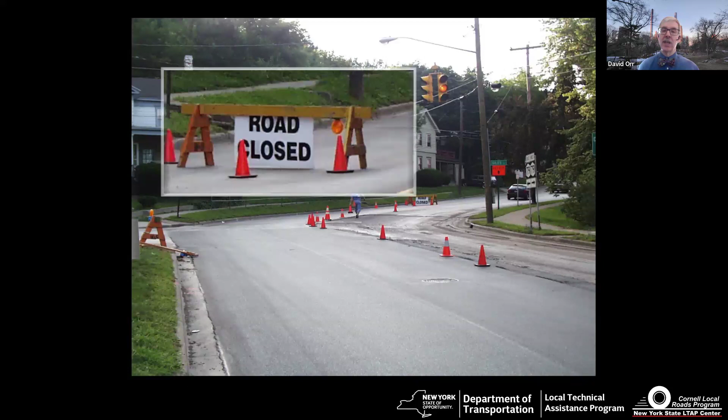Let's talk a little bit about who is using the work zone, because that might help us in terms of what we're doing for signage. So who are the work zone users? Tell me, who's using work zones? Let's put some answers in there, we're going to create a Wordle. If you don't know what a Wordle is, it's those little word maps that show up. Let's see who you think the work zone users are. And if you can't put it in, just put it in the Q&A and we'll mentally add that into the pool.

So we've got workers, pedestrians, drivers, grandparents, everyone, vehicles, bikes. A work zone user, yeah, the workers are in there and they're really important, we'll talk about that. The drivers, the pedestrians, everybody, dog walkers. Yeah, my friend was out walking his dog. Yeah, those are all people in a work zone, and we're changing what they're used to.

So it's really important in a work zone to communicate this information really well. Okay, so let's talk a little bit about some of these users. Now I've got my list, and as you can see, I've got the public, equipment operators, supervisors, and traffic control personnel.

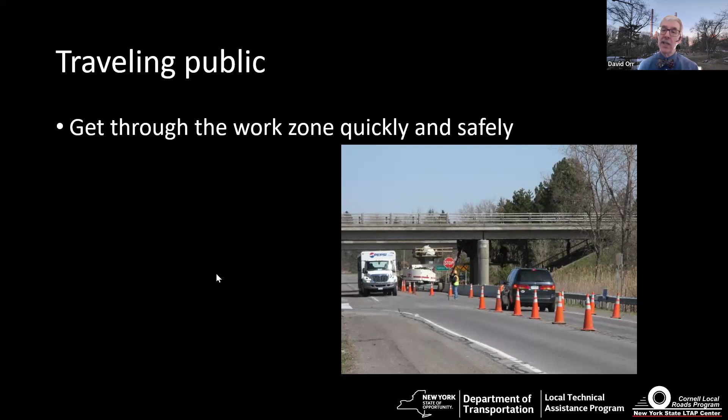I'm grouping them into these four areas because they generally have different points of view when they hit a work zone. The public, the traveling public, they just don't want to be slowed down. They know how to go, and a detour or slowing them down just confuses them. They really want to get through that work zone really fast, and while they don't think about it, they want to do it safely.

Equipment operators, on the other hand, let's be honest, are focused on getting the job done, as they should be. So they want to keep working without slowing down. A well-done work zone will actually help them there. And here's a case where maybe it could be a little bit better—I'm a little worried about where that flagger is standing. We'll talk about why that's really a bad location later on.

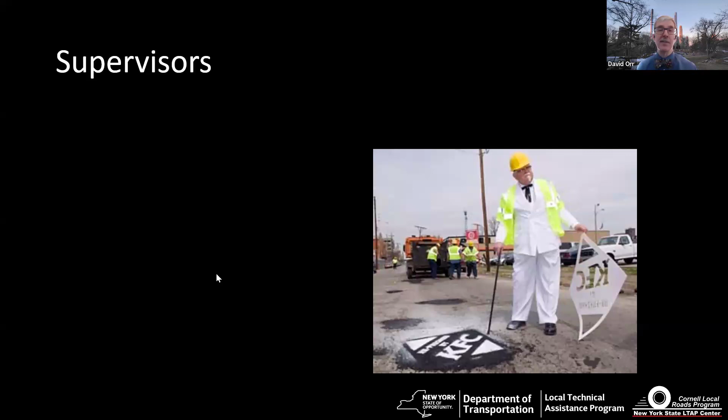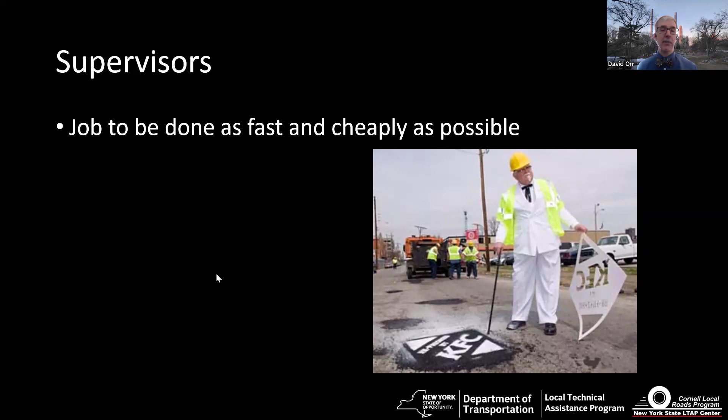The supervisor for the job—there's Colonel Sanders supervising some pothole filling in, yes, you guessed it, Louisville, Kentucky. They want to get the job done as fast and as cheaply as possible, and this is a little different focus than the equipment operators and the truck drivers and the folks doing the work.

And then finally, of course, the people doing the flagging and the traffic control. They really want to be able to operate a work zone easily with no safety issues. But if you've done much with a work zone, flagging traffic is either really exciting or really boring. It's that middle ground which we'd like to have, but it doesn't happen that often. This guy probably should be in a little bit better place and maybe paying just a little more attention, but we can talk about that.

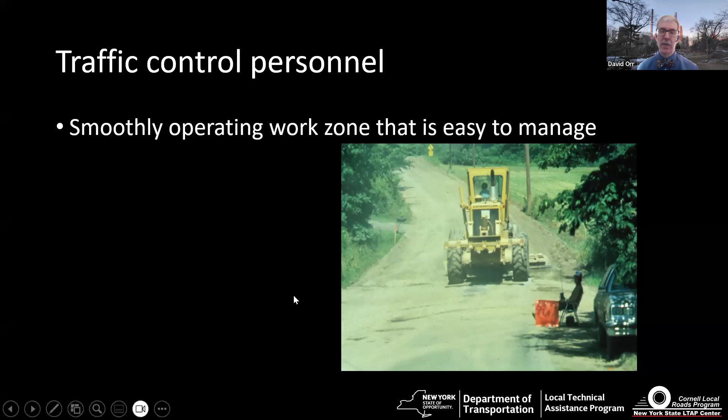So no one wants to be inconvenienced or placed in harm's way. That's really the ultimate goal of a good work zone, and it's a balancing act. Now, in terms of the traveling public, they want to make sure they can get through the site. They want to be able to see things. They've got their cars that they're dealing with, and they don't want to be slowed down.

So we got the traveling public with their cars. We've got buses that might have to get through a site, both a city bus and a school bus. So when you set up your work zone, you may want to think about what buses you've got to deal with, maybe even work with the bus companies to move things around. Of course, trucks have big turning radii that you got to deal with. You got bicycles, especially in urban areas, but more and more in rural areas. I worked in Yates before I was with Cornell, and there were a lot of bicyclists, both recreational riders and the Mennonite community you had to deal with.

Pedestrians are very vulnerable when they're outside their vehicles, so you have to think very differently about dealing with them. Different users have different needs—people who are handicapped in one way or another. We have to think not only about meeting the requirements of the ADA, but about really doing the right thing. One of the cool things is if you think about people in a walker, in a wheelchair, maybe colorblind, when you set up a good work zone for them, you're also setting it up for the pedestrians, for the mom walking her kids, or people walking their dogs. So if you think about those vulnerable users, you think about everybody—it's actually a pretty good way to do it.

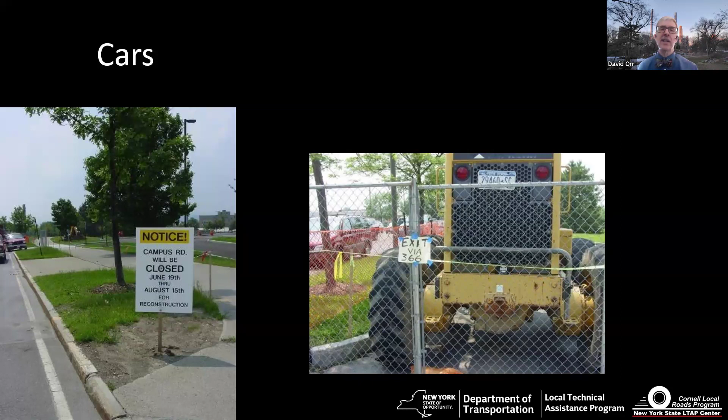Now, in terms of cars, you've got to give them notice they can see at the speeds they're traveling. A little sign like this might work in a parking lot, but on a main road, not so much. Or this one's even worse—they closed off the exit from a parking lot and put up this little sign that said exit via the state route. We've got to communicate a little bit better and have bigger signage.

In terms of the buses, again, you may want to work with the bus companies, and remember, they're going to have a different turning curve.

Don't make the lanes too narrow. You may have to widen things up. In terms of the trucks, they need to get in and out of the work zone, but you've also got through trucks. There might be a dump truck like this, or it might be a semi-tractor. So keep that in mind.

And again, of course, the bicyclist - don't you love it when you see a sign put right where the bicyclist or the pedestrian wants to walk? You're going to now force that bicyclist back out into traffic. So think about these things. And again, good signage helps everybody out.

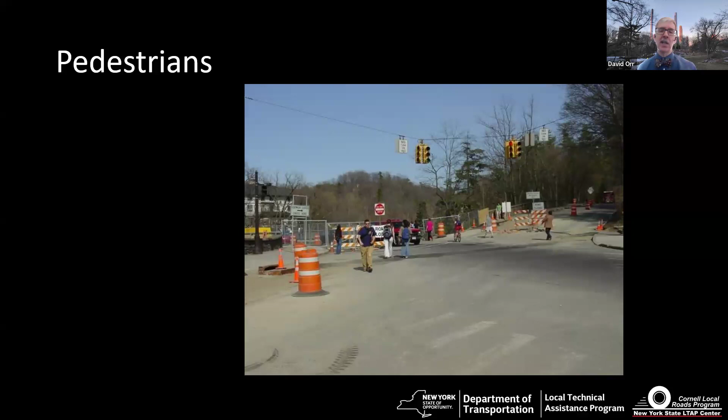And by the way, one thing about pedestrians: go where they go. You almost have to do a little bit extra signage if you really want to keep them out of a particular area, because they'll go where they think they need to go - through, around, diagonal, just keep that in mind. I mean, here it says pedestrians prohibited. They put up a diagonal sign, but more than a few times I would catch somebody had gone behind the fence line because they thought they needed to go where the truck was. So you got to think about what people do.

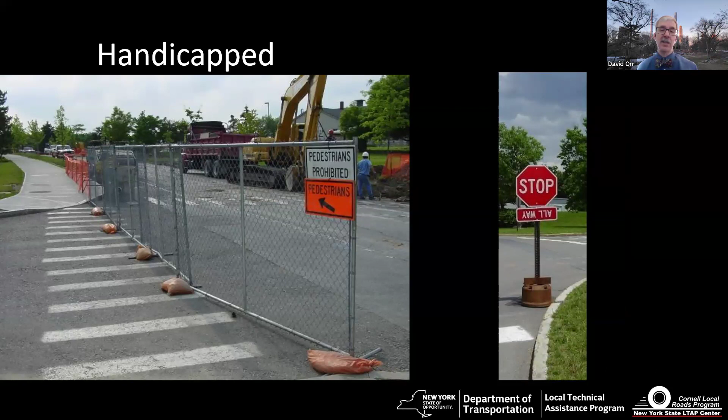And of course, for a handicapped person, they may not even realize they're getting into a dangerous zone if you don't prevent them from getting into that area, especially someone who's blind or has limited vision. So keep that in mind.

Okay, so let's ask ourselves, what are the regulations? What are the requirements that we're supposed to meet for work zones? Well, right now, as of today, currently, there is the National MUTCD from 2009, but it's really short-lived, and the New York State supplement to the National Manual on Uniform Traffic Control Devices, the MUTCD, plus New York State itself, DOT, has added some rules and regulations on top of it.

There was a brand new edition of the MUTCD. It was released back at the end of last year, and it has a 90-day window. It will be coming active really, really soon. Okay, I have good news and I have bad news. The good news is the changes really surprisingly aren't as great as you might think. The bad news is there are some changes coming. So watch this space - we will let you know about the critical ones.

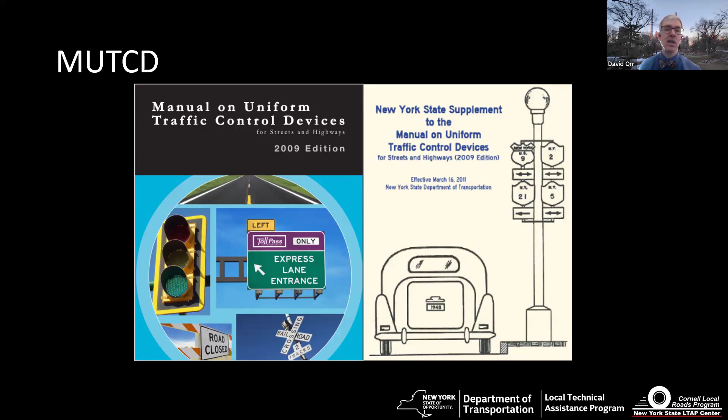Now, the key thing to think about, and this started with the last MUTCD, it's still true: the MUTCD applies for all roads open to public travel. Now, they did make some changes in the next edition in terms of parking lot alleys and stuff that were technically included last time and are no longer included. But again, essentially, if it's a road, treat it as a road and think about how the public's going to use it, okay? But whether you're in the road or not, think about all those users.

That's the key with good signage. Someone sees it, it's a clear, simple message, it's easy to follow, and it tells them what to do. Yeah, I agree with you, Donna. No, it really should be telling people where to go next. Give them good information. Sharp bend?

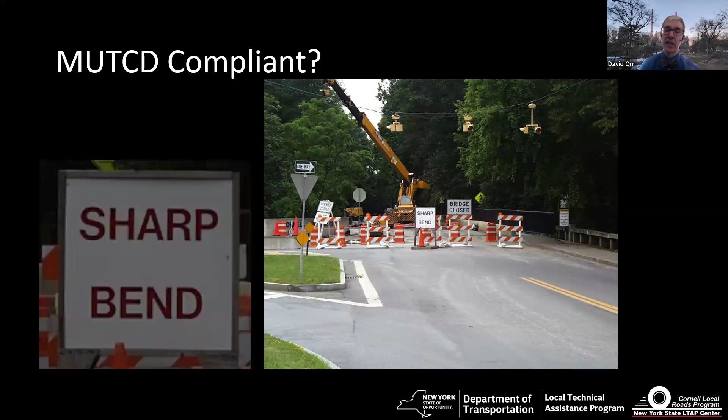Oh, and by the way, it's not reflective. It looks nice and bright during the day, but at night, you can't see it until your lights actually hit it when you get close to it. Luckily, most people knew you had to go to the left here, but really, we should be doing a better job of signing. What would you do there?

What would you do in that particular site? And again, it's an active poll. I'm going to pop back over here so you can see the picture real quick for those who want to see the picture. What would you do there instead?

Okay, so let's see what you guys have put in there. Okay, reflective left arrow, some chevrons. Yep.

So you really need to think about the use of directional signage. You might even want to go back with an advanced warning sign that lets people know, hey, it's no longer an intersection, it's now essentially a curve. During the work zone period, it's a curve.

So think about the user and simplify the signage, okay? Because if you don't, what you're going to do is confuse people, and too many messages create problems for folks, okay?

So what I would be thinking about is some chevrons, some advanced signage. Technically, that advanced signage should be orange and black, but I'll be honest with you, if you've got yellow and black in your stack and you can give people good information, you do what you got to do. Make sure you document it.

But yeah, technically work zone signs should be orange and black, but make it better signage, make it clear, okay? If you're not sure, show it to somebody who's not familiar with all the processes and see if they get confused. Show them a picture or show them a drawing. It can actually help quite a bit to make things clear, okay? So keep that in mind.

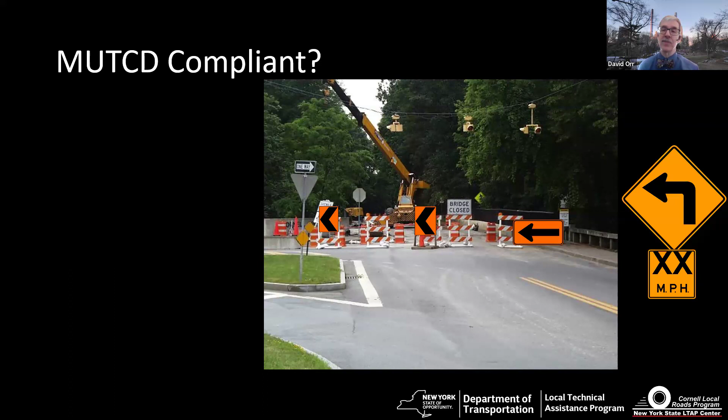So work zone warning signs are supposed to be black on orange. Again, there are some exceptions. There is one major exception that's always yellow and black, and that's a railroad crossing. They're 36 inches in size. I mean, you think, wow, that seems big, but at 55 miles an hour, it's really not that big. In fact, on the interstate, they should be even larger.

They need to be at least 1 foot off the ground for a variety of reasons, not the least of which is they're on the ground, they get disrespected, but also you want them to be able to be seen. And for a long-term work zone, you may even want to put them on a permanent mounted sign up at the 5 or 7 feet you would have, depending whether you're in an urban or rural area.

They need to be retroreflective. We say, well, we're not out there at night, but if you're there early in the morning or late at night, especially this time of year in the winter when the sun comes up late and goes to bed early, it needs to be something retroreflective. Plus, it actually helps even during the day to have the sign light come right back to the vehicle.

You need to have advance warning, give people time to react. And then one of my biggest pet peeves: remove or turn the sign when it's not needed. Doesn't take much. And we'll talk about that again because it's that important.

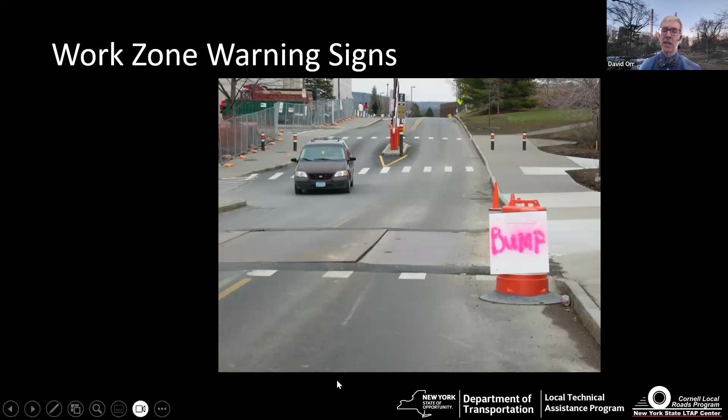Everybody who's in a work zone should be wearing a high visibility vest and safety apparel. And that includes the fire and police when they're not doing certain activities. Fire police need to have it, or someone directing traffic. The vest is really important.

Heck, if you know me, you know I actually gave my wife a safety vest for Christmas. Yeah, and she's gone through 3 of them now. She's on her 4th because she uses it to keep herself safe.

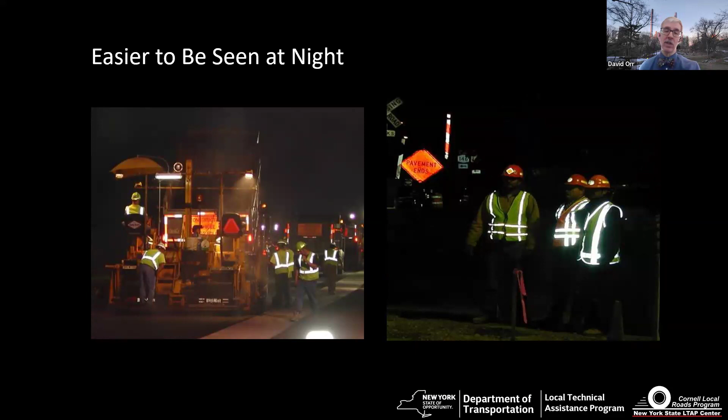So it is a safety culture thing, but make sure everybody can be seen. They need to have those stripes if they're in the right of way, and it makes a big difference to keeping people safe. It's easier to be seen at night if you've got on the proper equipment. Your vehicle's lights hit them, you can see the workers working at night, and it's true early in the morning and late at night as well.

At 55 miles an hour, you can't tell. If you don't see the person, it doesn't matter, you're still going to have problems. So everybody should be having a vest on so they can be seen day and night.

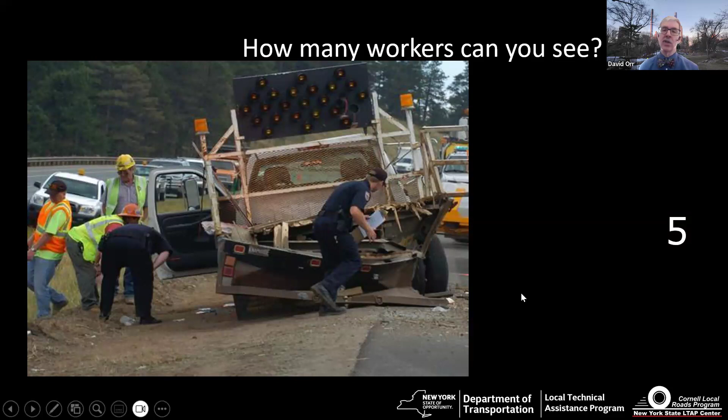It really helps. I mean, how many people on the right in that particular photograph? Okay, I got a 6. I got a 7, got a 6. One thing about work zones, especially complicated work zones, we get all this orange barrels and signs and people get lost. If you look now that we've got the picture, there are actually 5 workers there.

One's wearing an alternative color. And actually, we recommend that the flagging crew, the work zone crew, sometimes purposely wears an alternative color, the lime green, so they can be seen. And then, of course, we have somebody, probably the supervisor, actually more likely probably the engineer, who hasn't bothered to put on his vest yet because he thinks he's okay. We catch ourselves doing that. We probably should do better. But so something to be thinking about.

Okay, thanks for letting me know. Some people are having their picture show up delayed. I'll try to slow down. It could just be the Wi-Fi connection. That's always the challenge of the webinars. We'll have fun with it.

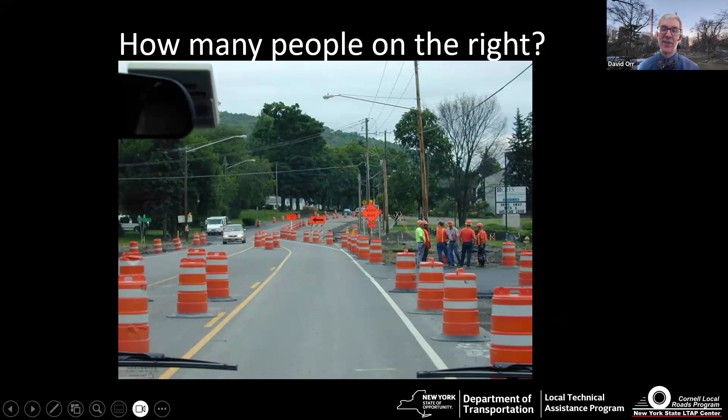Okay, so what are the qualifications for a good flagger, by the way? Let's talk a little bit about flaggers. What are some qualifications for a good flagger? Let's see what y'all think. Attentive, trained, precise, alert, because the world needs more alerts.

Okay, get off the phone. Watching, focused, yep, aware of what's going on. Yeah, pays attention, engaging, yep. Shows respect, dresses well, yeah. These are all qualifications for a good flagger.

Okay, let's go see what I've got. Flaggers must be alert, okay, and that's absolutely critical. We really do need to have flaggers be alert, okay. They need to be visible, standing away from the work so they're not hidden, okay.

They need to be motivated. They need to be trained. They need to stand alone away from things. Okay, they need to face traffic because that's really what they're trying to do is they're trying to see traffic coming in the work zone. But how many times do you see workers standing facing the work zone? Oh, I want to be in the work. Their job is to protect the crew, including themselves.

Okay, now somebody put in the Q&A they need to be certified by the union. If they're on a union job, that may be possible. New York State, interesting, does not have a requirement that the flagger have a card, but they do have to be trained. Okay, it's a little different than some states that require they have a certification card, if you're wondering.

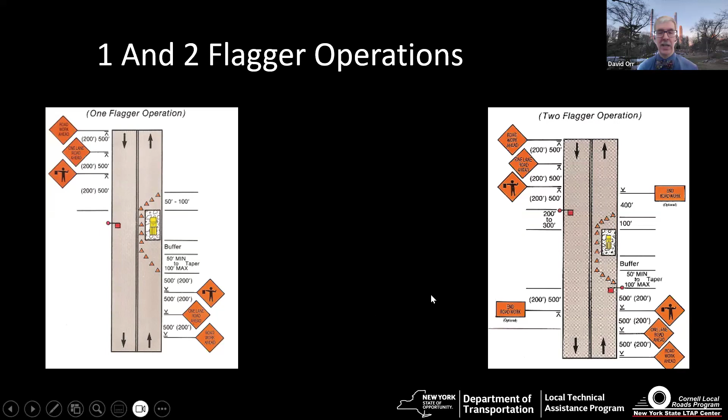If the work zone is long enough that they can't walk back and forth and stop all the traffic, you need two flaggers. So with one flagger, that person actually has to keep moving back and forth. You need somebody with the ability to be flexible and move. It sounds like you're saving money, but your risk goes way up, and it's not recommended in a lot of cases. Really think about the two flagger operations.

Now, there are lots of other choices. For instance, at an intersection you may need multiple flaggers, and you may even have to have someone with a flag in that case. Maybe you could set up a detour and get traffic away from the site completely, and then you wouldn't have to have flagging at all.

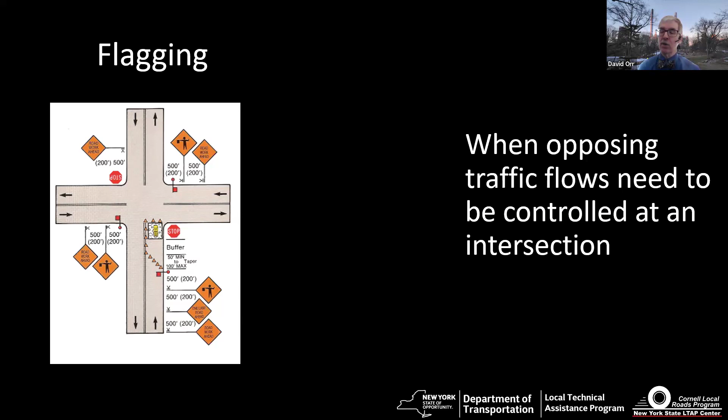Don't be cheap. I know it's hard, especially in small towns with a crew of 4 or 5 or 6 or 7 -- wow, big crew. It's a challenge, I know. Maybe you work with a fellow town, maybe you work with the village. Try to spread that burden out, because flagging is really, really important.

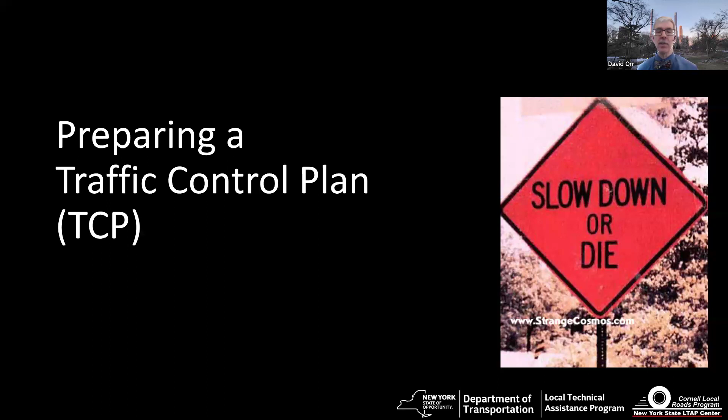Now, what I want to do is finish up the last half of our session together. We want to prepare a traffic control plan, okay? I really believe in traffic control plans. On the other hand, some can get really complicated. Let's keep it simple. Now, a traffic control plan is specific to the work zone for the day, okay?

Okay, I've got a little fact here. I'm going to read it. According to Ed Sterowitz, he's a safety guy -- if you don't know him, he likes to do risk management, he was our risk management guy earlier -- he says in 2002 there were 441 work zone intrusions on the state system.

Now if you think about it, the state only owns about 15% of the road mileage, but they do have about half the traffic. So if you just double that number, that means there were about 800 to 900 work zone intrusions. So we need a good plan. We can't have intrusions, we don't want cars in there.

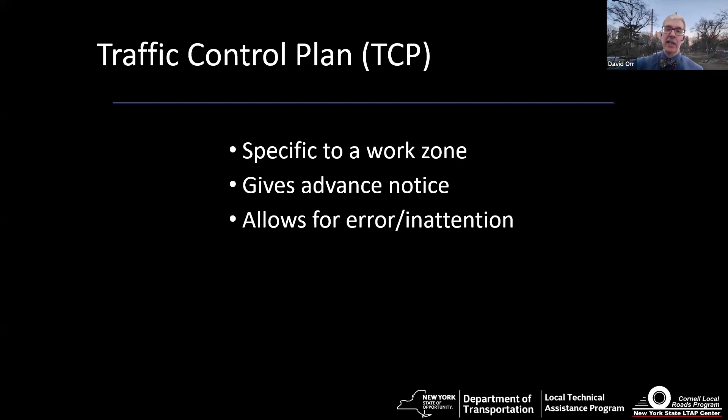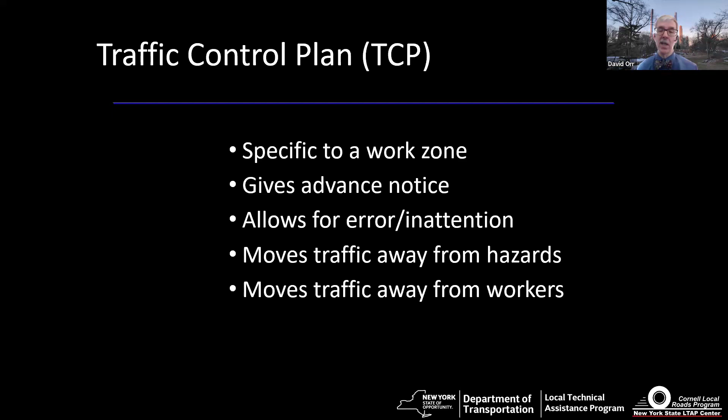So a good plan, specific to the work zone, gives advance notice. It allows for error and inattention, like it or not -- people have got their phones and they're driving with them, or trying to use the touch screen thing on the modern car. You got to allow for that. That's why advanced signs are key. Move the traffic away from the hazards and away from the crew. Absolutely key. And of course, if you do that, you're going to have a safer plan.

So what documentation do I need in my traffic control plan? Let's put in there: what's your documentation in your traffic control plan? You're going to have a layout, you're going to have a written plan, and you're going to show where your flaggers are going to stand.

You may want to have an engineer stamp it, especially for detours. I think long-term work zones and anything that's going to have a detour really should be thinking about having an engineer look at it, and certainly in some cases some agencies do require it. But again, do you have access to an engineer is something to think about. What equipment, what personnel are you going to have?

Where are the signs going to be? Yeah, the proper advanced signage. We all know these things. We go, oh boy, it seems like a lot of work. But it turns out it's not that bad. I mean, in terms of documentation, it would really be nice to know.

There we go. It would really be nice to know the starting and ending time of the work.

And you're thinking, wait a second, I don't know the ending time. Well, you start with a sketch of where you think you're going to start and end, and then you modify it. Keep it simple. There's no point in getting complicated.

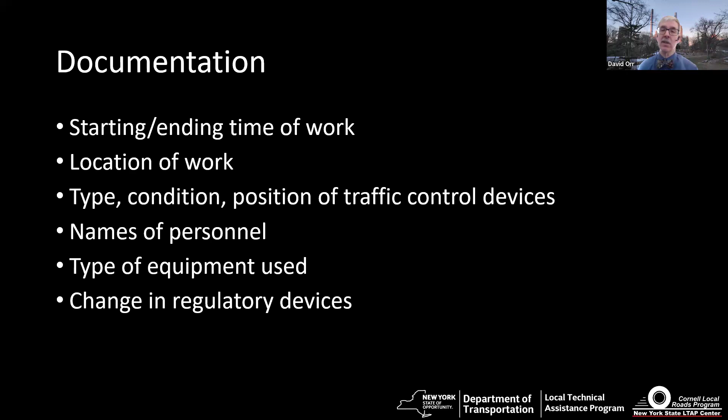You can do the location, what road you're on, what are the positions of the traffic control devices, the personnel, the equipment, any changes to regulatory devices. This is actually a really key one. If you cover up a stop sign or turn off a traffic light for the day, make a note of that. Put it down in the documentation.

Now, the pocket guides that we've got, and we have an app by the way, I'll talk about that a little bit too, make that job easy for the majority of your work zone. For your simple work zones, it's really easy, okay?

And yes, for a long one, you'd need a detour plan. But for a simple one, you've got 5 parts: your termination area, your work zone, your buffer, your transition, your advance warning area. They're in the pocket guide. You don't have to reinvent the wheel at all.

Now, in terms of your advanced warning area, that's where you have your 3 signs in advance of the work zone. So you're going to document that down. You're going to have that in your traffic control plan. You're going to have your initial warning, give some more specifics, and then tell people what to do.

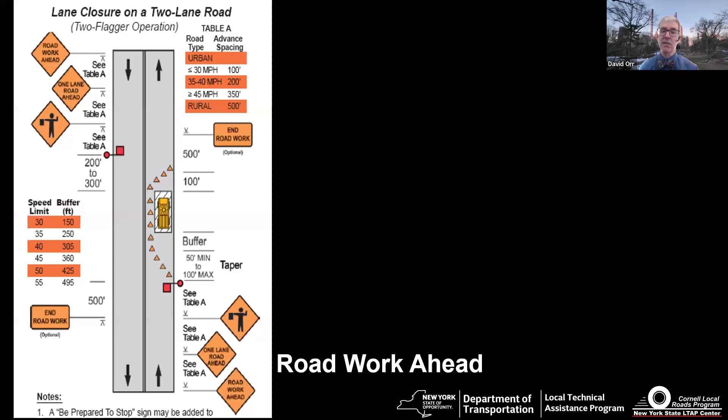So here's the example of the 2 flagger setup. We've got road work ahead. We've got a 1-lane road coming up, and you've got a flagger. That tells people what to do. 1, 2, 3. Keep it simple.

The transition area is where you take people out of their lane. And this is where the most issues occur, because if they haven't seen the signs in advance, this is where you're going to have problems.

Your flagger should be standing off to the side, with an escape route if something does go wrong. If somebody comes through that work zone, the 2 choices are run into the other lane, not a good idea, or run and hit a piece of equipment and get trapped. They really need to be standing in a place where they're safer. Having a crash attenuator is again going to be recommended on all state jobs and maybe on others, but you've got to have the flagger standing in a safe spot.

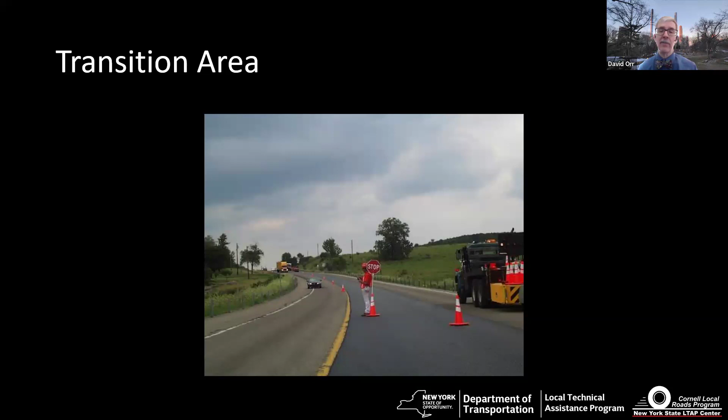You need a buffer area. That's the distance between where those transition cones are and the actual work. Now, again, that work area is important, but you need to have a buffer in front of that work area. In this case, there's no buffer at all. Think about putting in a buffer so that if someone goes through the cones, they still have time to stop. In this case, it's what, 20 feet, maybe 50?

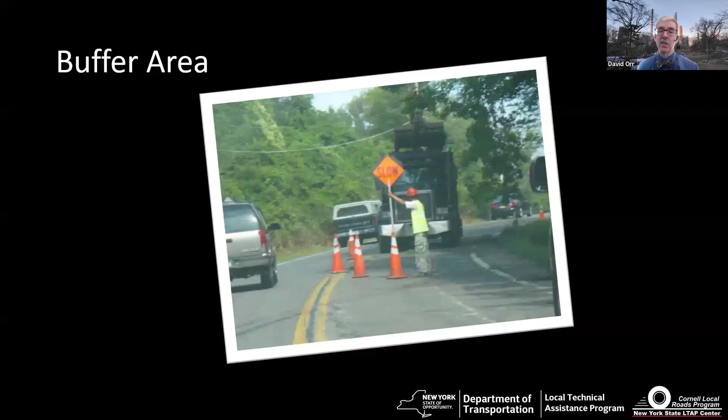And if someone goes past that flagger, who again is in the lane, they're going to just wind up in the work zone and hit the crew. So really think about that. You really want to put some cones out. Cones help a lot. And where's that flagger? He should be standing, if he's one flagger, on the other side of the road. Can you really control the traffic in this case? So really could be a challenge, okay?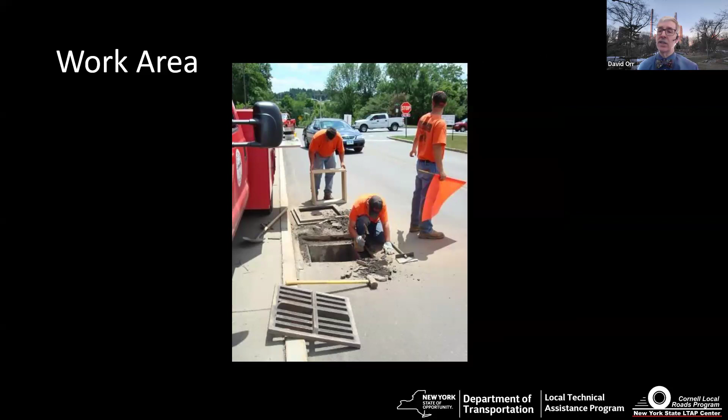Now, the last thing is the termination area. That's the sign that says the end of the work zone. If it's obvious, you don't have to put that sign up, but if you're not sure, put the sign up. It's simple and easy, especially for long-term ones. It's probably not a bad idea.

Now, how far apart do we put these signs? Well, in an urban area, 100 to 350 feet, and again, adjust to the site. Just think about the old Burma Shave signs. Yeah, I know I'm dating myself, but 1, 2, 3, go.

In a rural area, you need about 500 feet, by the way, just to give people time to be able to read, hey, road work ahead, hey, 1-lane road ahead, there's a flagger. Give people time. And again, if you change from the standards, document it.

In terms of placement and approval, is it based on the roadway speed limit? In a rural area, we just typically go with the 500 feet because we know what people are actually doing for speed. And yes, urban areas are based upon the speed limits involved, but also think about what people are actually driving. If they're going really fast, you might want to go with a bigger spacing to give more reaction time. The nice thing about 3 signs is it makes it pretty simple.

If you've got 3 signs, you've got plenty of reaction time. And the key is good spacing. Don't go too far, and those spacings they found have worked pretty well. There's some speed limits in there in the pocket guide.

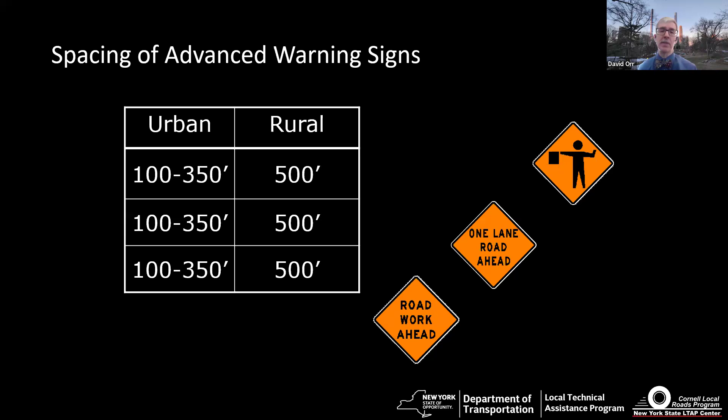In terms of placement and removal, before you get in the work zone, you put up your 3 advanced signs. So the first sign you put up is the road work ahead, before you've done anything else. Then your 1-lane road sign, your flagger symbol, then you put the flagger out there to start controlling traffic, then you put up your cones. At the end of the day, you take the cones down and remove things in the exact opposite order.

We'll go through those in more detail in the long full-day class.

The critical point: hide, cover, or turn away the work zone signs when they're not needed. If you're working on a road during lunchtime and taking some time off, but there are still workers in the area, you can leave the work zone ahead sign, even the road work sign, but at least turn the flagger symbol. If it's going to be a long period, maybe turn the first 2 signs. It really helps. If the driver sees the signs are turned, they realize right now they're on a break, not actually working, but they might be later. So when they come back through and see the signs turned, it really helps.

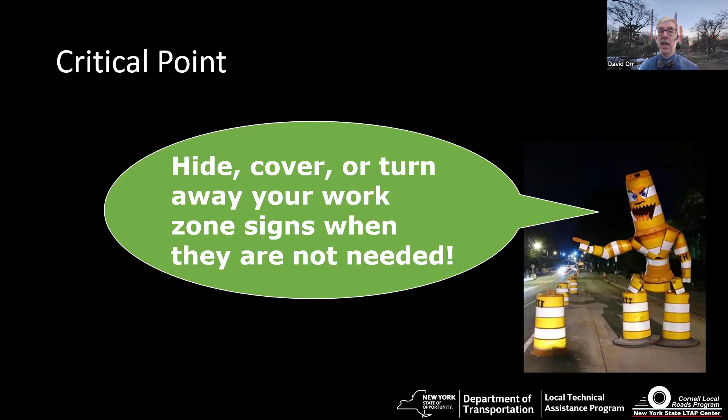On the other hand, if the signs are always up, even when you're not working, or worse, in the middle of the night, the next time someone comes through, you know what they're going to do—they're going to ignore it. They're much more likely to drive into your work zone and be one of those 400 plus intrusions on the state system, and probably close to 900 on the local and state system every single year. So turn and cover them.

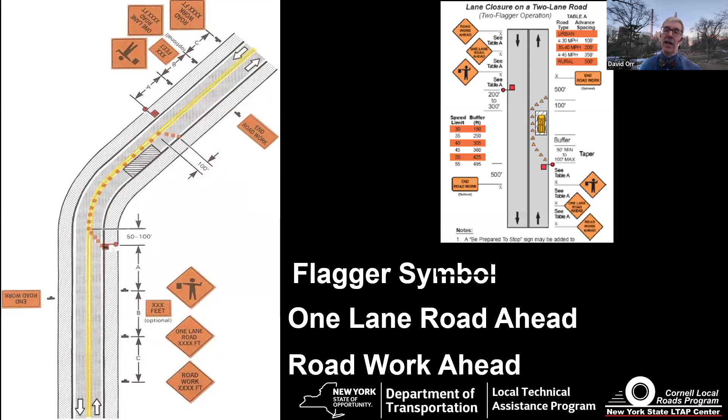Now, you can get fancy. There might be curves, you might have to adjust for things like that, but it's still the same—give people those 3 advanced signs and really help them out. The pocket guide shows it as being straight, so you might want to document slightly differently.

Can you always do that? Well, in an urban area, it could be tough. So you adjust, you do what you can, but think about what you really need. In this case it says 1-lane road ahead, but it probably is 2 lanes—you probably could have just gotten away with 'road narrows.' But what have you got?

Now, a good note made by Paul about the fact that you can reduce the speed limit. You can—it's actually relatively easy to do. You can lower the speed limit in a work zone. To do that, there's some documentation you have to do, there's some standards, but you can do it. Just make sure you cover the other signs when you put up a work zone sign, so the only signs people see are the current proper signs.

So we're going to prepare a traffic control plan. Now we've taken all this stuff and thrown a bunch at you. We're going to go back to our friendly example with the flagger standing in the wrong spot. You can see this is actually on the Cornell campus, and there's the catch basin they're working on. It's a relatively high volume roadway—a few thousand cars a day actually.

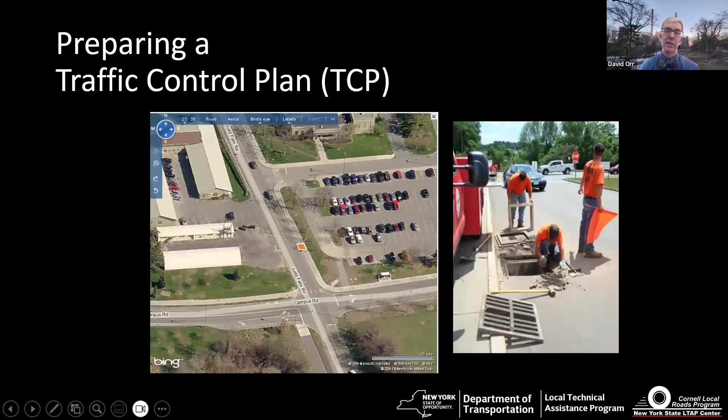So let's ask you—I'm going to give you some choices: lane closure, minor urban street, self-regulating; lane closure, 2-lane low volume road, 1 flagger operation; or lane closure on a 2-lane, 2 flagger operation. I don't have a poll, so just in the Q&A, tell me what you think you would choose.

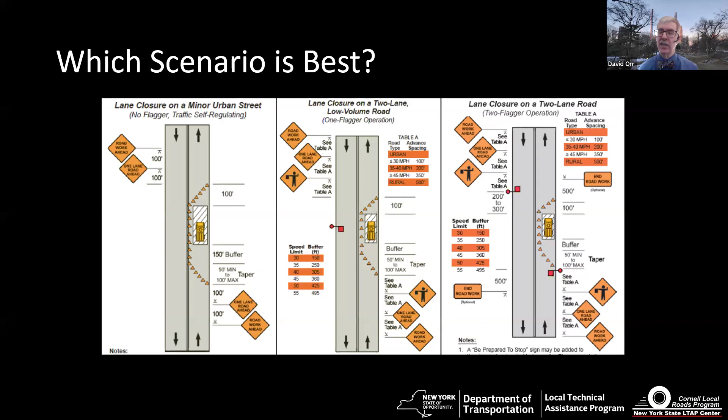You'd use the third choice, 2 flagger operation. Yep, most of you, I hope you say 2 flagger. That really is a 2 flagger operation. It's really risky to do the 1 flagger operation with that kind of volume. And self-regulating, that's designed for a residential area where it's 10 vehicles a day, and you've got to worry more about people walking their dog than anything else.

Now, in terms of keeping it simple, let's say you're working on a minor low volume road and you can get away with just a lane closure, no flagger, just closing the lane down for the day. You can take that little pocket guide, walk over to your copier, put down the drawing that fits your scenario best, put it on the copier and hit go. You now have a work zone traffic control plan. Then all you have to do is fill in all the details on the right: the date, the work, the crew, the equipment. If you change the sign out, like in this case a utility work ahead rather than a road work ahead sign, just fill those things out. You can do a work zone plan in less than 5 minutes that will not only hold up in court, but give good communication to your crew and eventually good communication to the public. So it's a win-win.

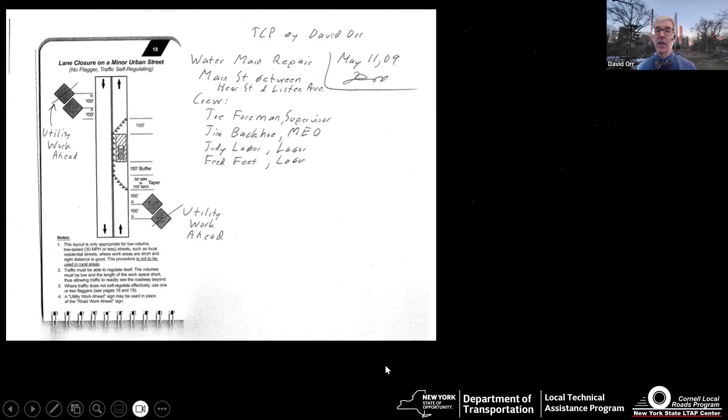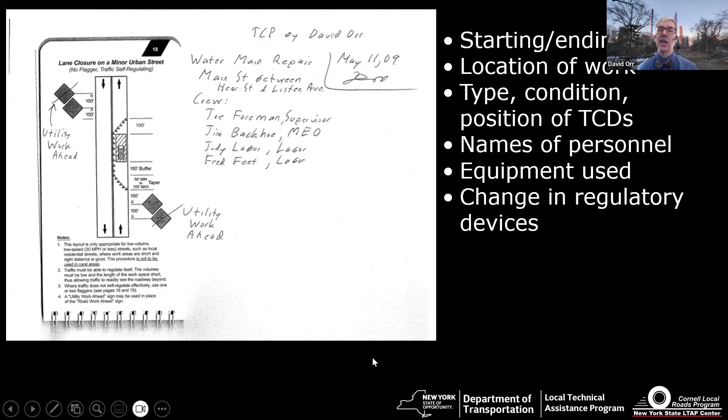So keep it simple. It's the same information. And by the way, once you do it once, you have a record, it goes in the file. Later on, if somebody tries to sue, hey, I've got everything I need to have. So it really works out really well. Keep it simple.

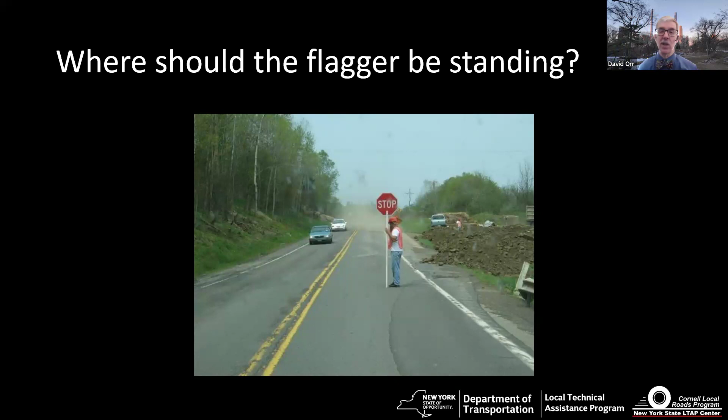Essentially, you push a button and the sign comes down or the bar comes down. In the full class, we can show you some pictures and talk about AFADs. A lot of agencies are starting to use those, and they might be expensive to start, but long term they can be very useful. But of course, there's the economics of everything.

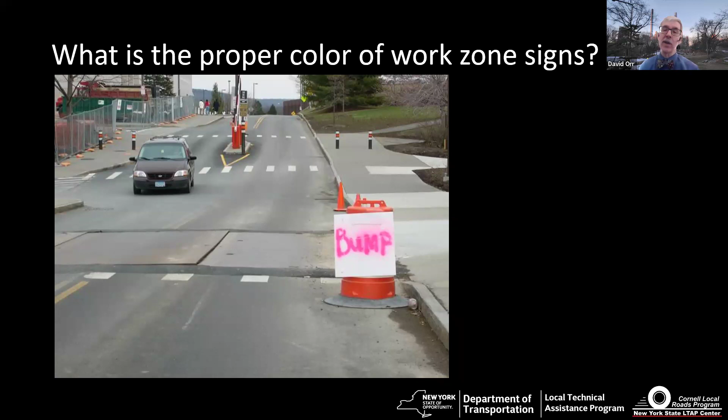Okay, so what's the proper color for work zone signs? What color should work zone signs be? Let's see what you guys think. Orange with black. Yeah, orange with black. And again, are there a couple of exceptions? Yeah, there's the railroad crossing ahead sign, which is always black on yellow. And if you've got a situation where you need to put a curve in and you've only got yellow and black for that, you do that and you document it, because that's what we had. Good communication. You may want to consider notifying the police for an extended project. And yes, not pink spray paint that can't be seen at night, and oh, by the way, covered up the stripes that were on the barrel.

Okay, and who should be wearing high-vis clothing in a work zone? Everybody. Yeah, everybody working in the work zone. And if you're getting federal aid, it's required. But yeah, everyone should be wearing one. They're relatively cheap compared to the cost of getting hit, and they really do help.

And again, we recommend that the flagging crew actually wear a different color than the working crew. So if the crew is wearing orange, have the flaggers wearing lime green. If the crew wears lime green, maybe have the flaggers wear orange. Try to keep them visible. They're protecting you. They're first protecting themselves, and then they're protecting you. So it's absolutely key. Versus this guy, who a vest might help, right?

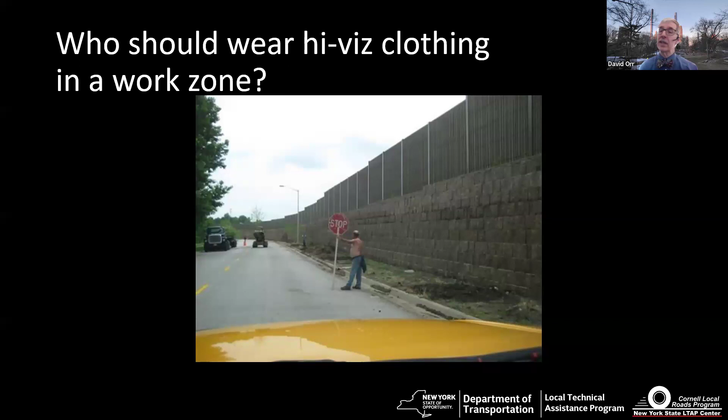And again, where is he looking? He's not looking at you and I. He's looking down the road. Yes, he might just be communicating with his partner at the other end, but that's going to happen. And good high-vis clothing is really important, even on a hot day.

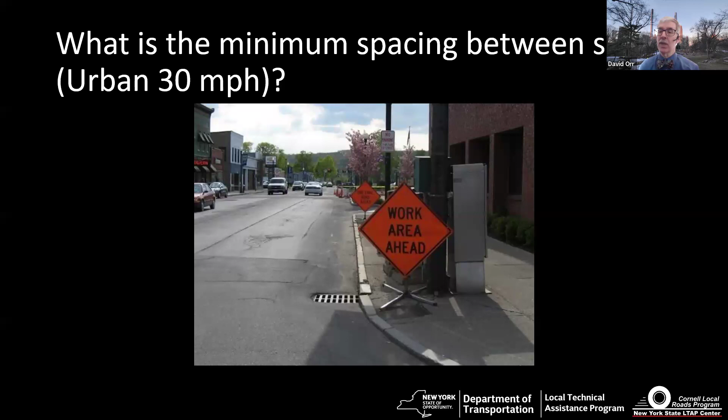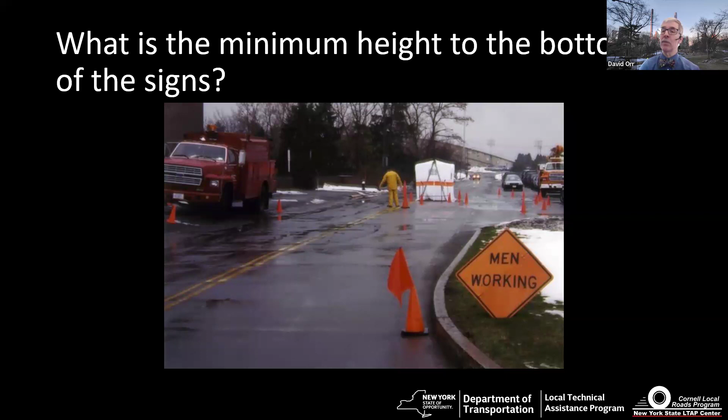What's the minimum height to the bottom of any work zone sign? Yeah, 1 foot. Very good. This looks crazy, I mean it doesn't show any respect. You really want it up there. If there's any snow, any grass, you really want it up. And again, someone mentioned 7 feet. If it's a long-term work zone, you're going to be there more than just the day, or especially if you're going to be there for a long stretch, think about mounting them on posts. It would either be 5 feet or 7 feet, depending whether they're in a rural or urban area.

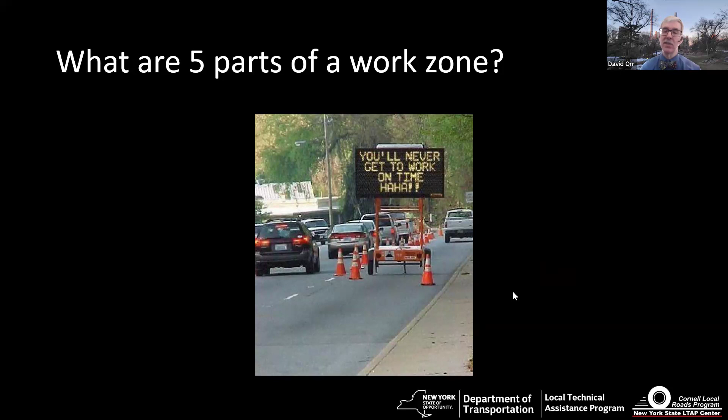Okay, and then what are the 5 parts to our work zone? See if you guys can give me all 5. You got everybody together, you can all collectively give me the answer. You don't have to put all 5 in, just put 1 in and we'll see if we get them all. The termination, advance warning, very good. Transition, very good. Okay, I'm looking for 2 more. Buffer, got buffer, okay got 1 more. The work itself, the actual work itself. Okay, so those are the 5 parts: the advance warning sign, the transition to move people out of their lane, the buffer, important for providing a place where people do get into the work zone, and then the work area itself.

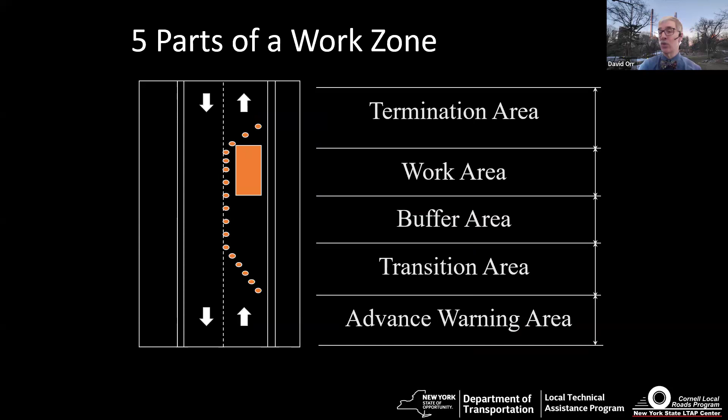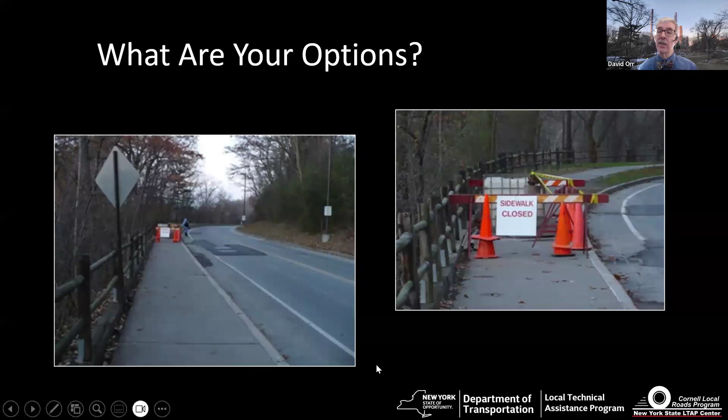You might have to have people walk on the shoulder. Yeah, you might have to make a dedicated sidewalk temporarily, and you might have to add some cones or even jersey barrier on the roadway, depending on the traffic volume. And of course, you need to think about if somebody has a hard time walking, maybe they need a ramp put down to help them get down there. And yeah, those signs, they're not the right kind of signage, we need better signage that can make it more visible. Okay, think about all the users. A bump out area from the driving lane means you have to warn both the drivers and the pedestrians. Okay, how about this one?

You're definitely off the road in this case, so we don't have to worry about the road, but what do you see wrong here? You need to add some water to the cutter, it was pretty dusty. Some more cones, some arrows, some more signs. Move the signs.

Even in an off-road area that looks pedestrian only, think about a buffer space, the space between where you're going to move the people out of their normal path to where the work is, to keep them away from the work. And one guy does have a vest on that's a little loose, might want a tighter vest there, and the other guy doesn't have a vest on at all. So think about being seen.

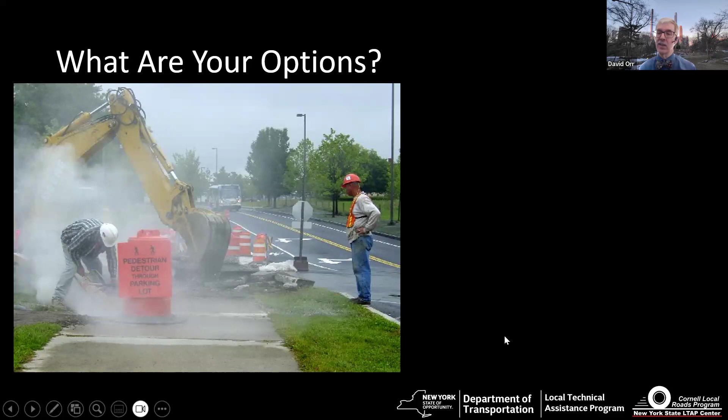Yeah, maybe detour, close the thing off. I'm okay with that. But remember, all those people who live on that road, they want to get in and out. So you really have to communicate.

When they did it well, it worked pretty well. When they forgot, that happened once too, people wanted to get to work and all of a sudden they couldn't get out. That didn't work too well at all. So again, think about what your options are. That's what they did: they closed the road off and communicated ahead of time.